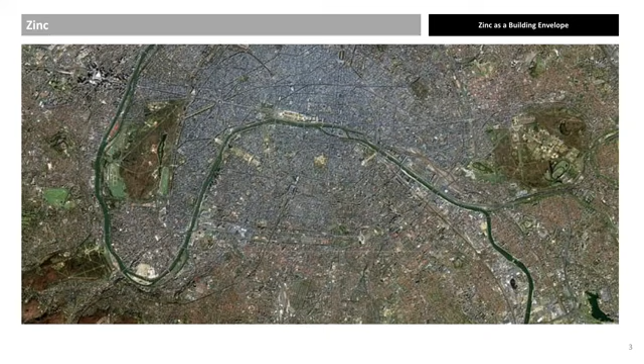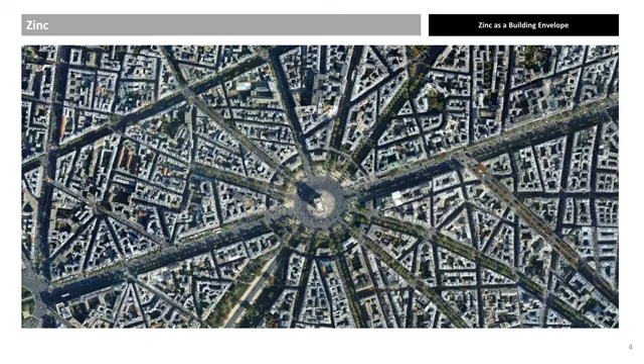This is a satellite image, but of what? An aerial image of Paris. The Arc de Triomphe is in the centre. Clearly you can see that the main colour from above is grey. That is because most of the roofs in Paris are covered with zinc. 95% of all metal used in Paris for roofing is zinc.

The nature of the architecture chosen by Baron Haussmann in the middle of the 19th century, combined with the colour and availability of zinc, made it the ideal material. Much of this architecture required roofs to have a slope of 3 degrees. This is still the minimum slope for zinc roofs as built. Going below this slope greatly increases the chances of water ingress and staining and is not recommended.

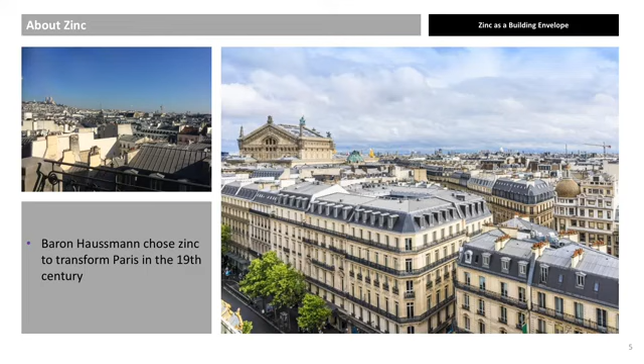Paris and St. Bartholomew's Church in Liège. First ever zinc roof fitted in 1809. Zinc ore is relatively common. The richest areas are Peru and Canada, but zinc mines do also exist closer to home in Ireland and Sweden and up until 1949 in the North Pennines. Traces of zinc were even found in the ruins of Pompeii.

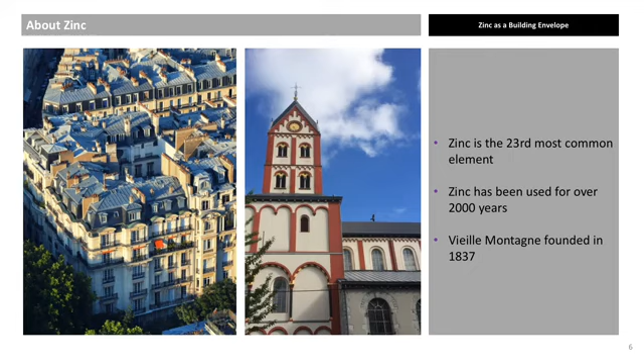VMZINC has been produced continuously since 1837. Prior to the 1970s, all zinc sheet produced was mill-finished natural zinc. Furthermore, older zinc had more impurities, such as cadmium. This can sometimes give the zinc a whiter aspect, visible in this photo. Cadmium has been eliminated from zinc for almost 50 years now.

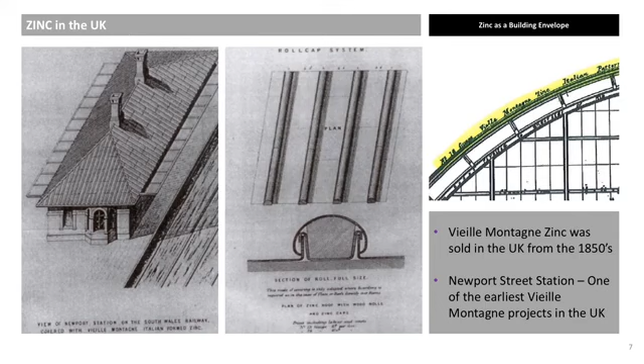Zinc was not only used in the redevelopment of Paris, but was also widely used in the UK for civic buildings, railway stations, King's Cross facade, etc. in the 19th century. However, zinc's use in the UK, unlike in continental Europe, remained quite limited and indeed almost disappeared entirely by 1990. Zinc production and sustainability.

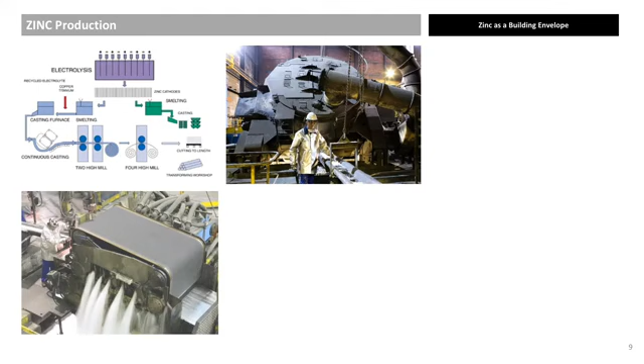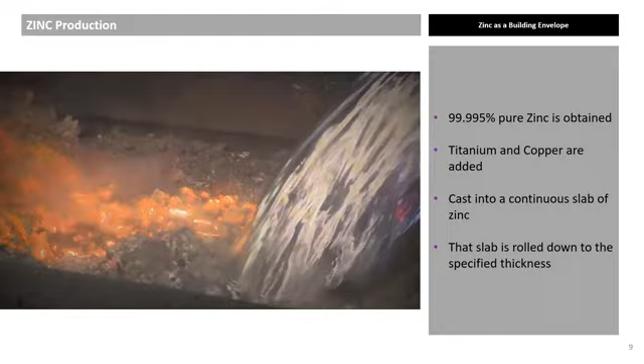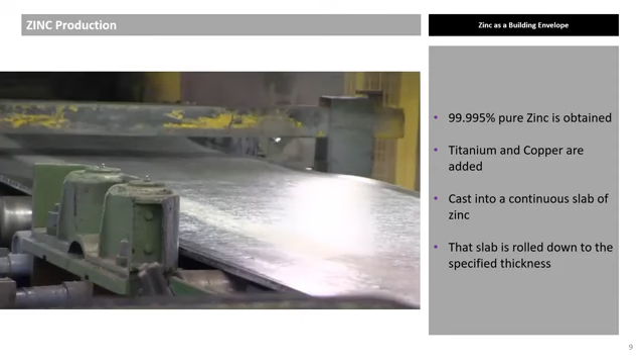Approximately 1 kilogram of titanium and copper are added to 999 kilograms of special high-grade zinc, EN 988, in order to improve the tensile strength and creep resistance of the material. The mixture is heated up in an oven before being cast into a continuous slab. The zinc is then rolled down to the necessary thickness. Zinc used in the UK is usually between 0.7 mm and 1.5 mm.

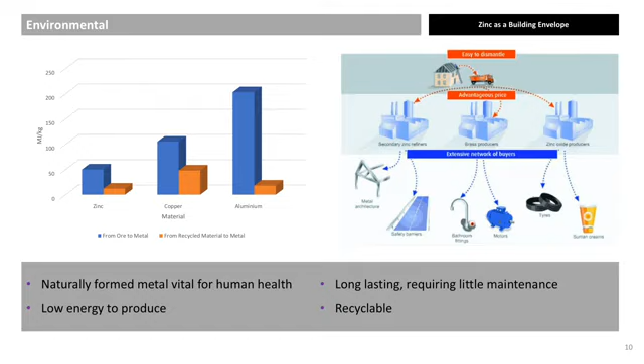Zinc is a non-toxic element, Zn, and required by all living organisms, an essential element. Due to electrolysis taking place at room temperature, less energy is required to produce zinc than other metals. The BRE Environmental EN 15804 gives an expected life of 100 years for a zinc roof. At the end of its life, with limited maintenance, zinc is 100% recyclable. Some recycled zinc is then used for roofing applications, but much is also used for galvanizing, brass production and zinc oxide used in skin creams.

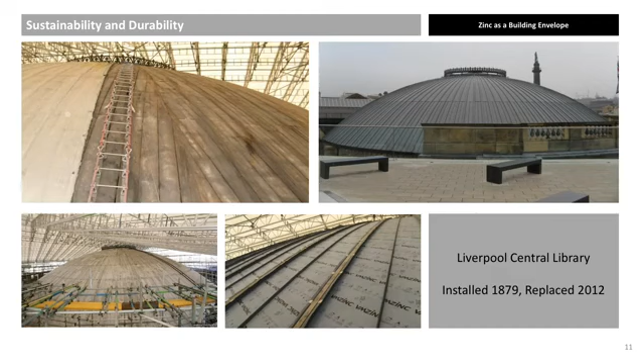The Picton Reading Room Dome, Liverpool, was built in 1879 using zinc. After 133 years, many of the zinc panels were needing to be replaced. However, much of the original open-gap boarding was kept due to good design and installation. While the vast majority of the original design was kept, 21st century regulations meant that panel width had to be reduced and standing seams were incorporated between the batten caps. Current corrosion rates are less than 2 microns per year. A sheet of zinc is at least 700 microns thick.

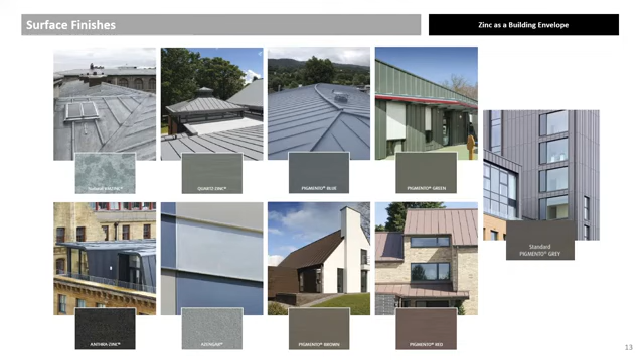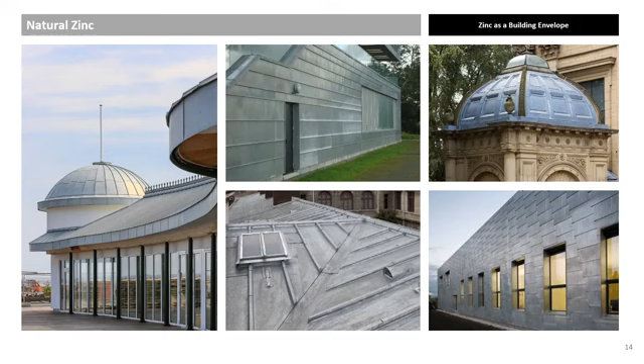Aesthetics of zinc. Zinc can be chemically treated to give a wide range of different aspects, but always with a hint of grey. Natural zinc was the only option until 1978. Natural zinc is shiny but forms a patina when it reacts initially with water and then carbon dioxide. After 3 to 10 years, an even middle grey patina is formed, but it takes time for this to become uniform, and many building owners are not that patient.

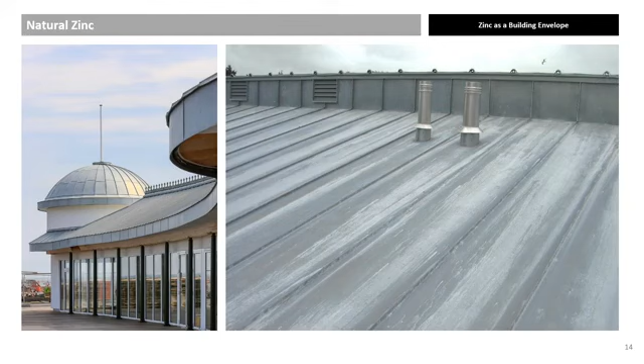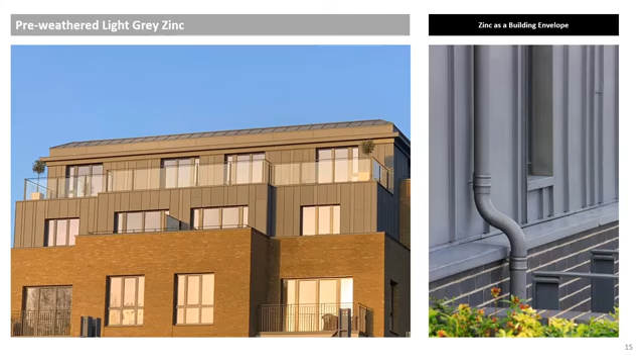Pre-weathered light grey zinc imitates naturally weathered zinc through a phosphatation process and changes very little over the lifetime of the roof or wall. Whilst pre-weathered light grey zinc is not a painted finish, it is closest to RAL 7037. Examples of light grey pre-weathered zinc: Borough Viaduct, Winchester House, and Sevenoaks School.

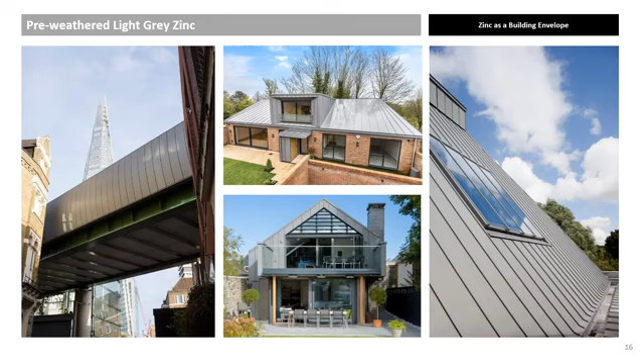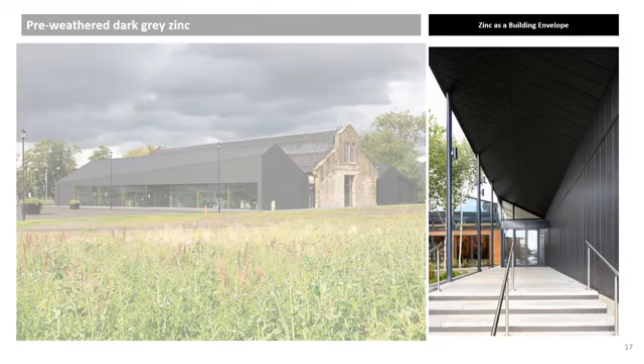Pre-weathered dark grey zinc was first created in 1978 as a complementary flashing and gutter material for slate roofs. Its dark grey aspect has made it very popular for both wall cladding and roofing. Zinc would never naturally patina to a finish as dark as this zinc. Whilst pre-weathered dark grey zinc is not a painted finish, it is closest to RAL 7021. Engine Shed, Stirling. Murphy's Construction HQ, London.

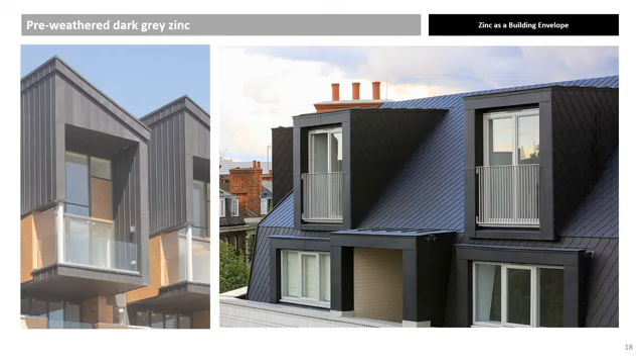Pre-weathered zinc can be used in the same way as a natural mill finish zinc, whether it be for roofs, walls, using various techniques, or even gutters. Seen here at Cardiff Point and Bourne Estate, London.

Blue, red, green, brown and now grey are pigmented finishes. The mineral pigmented zinc range is not a painted finish. Rather, it is more like looking at light grey pre-weathered zinc through tinted sunglasses. The surface colour is created by adding mineral pigments to a durable pre-weathering, which is then sealed with a protective coating, creating beautifully organic red, green, blue, brown and grey pre-weathered zincs.

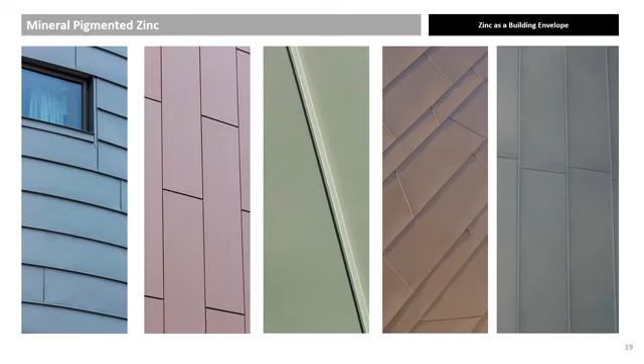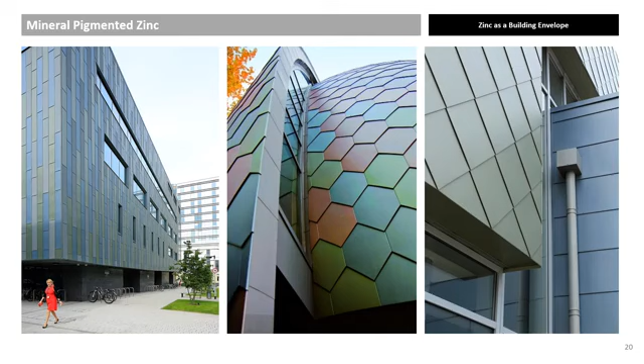It can be used for the same applications as natural, light and dark grey pre-weathered zinc. Examples shown: Glasgow Hospital, an architect's office in the USA, and Southampton Hospital. Godson Street in London uses all finishes.

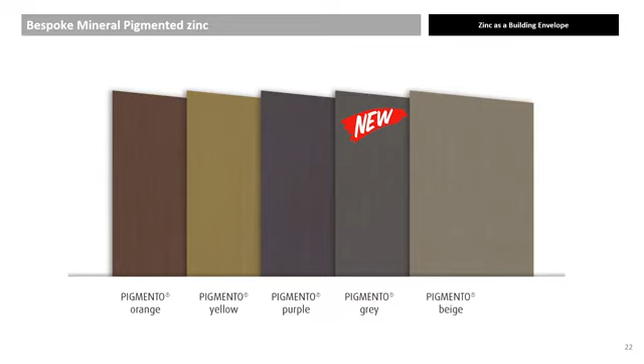Job-specific mineral pigmented finishes are an option when the minimum order is 3 tons. These colours illustrate some of the possibilities, but bespoke colours are possible. Light grey pre-weathered zinc is the base, so darker colours are best. Bespoke pigmented green. Body Shop brand relaunch. Oxford Street, Bond Street store, global rollout.

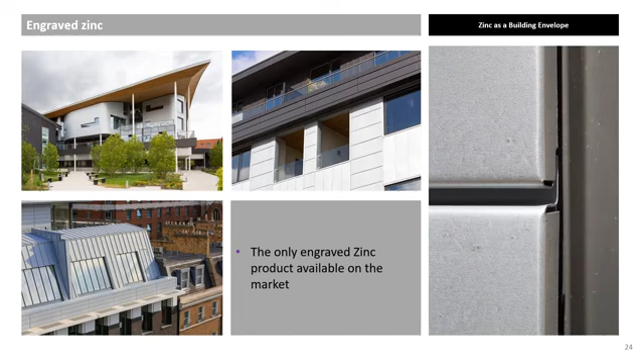Engraved zinc combines a mechanical treatment with a chemical treatment and can be used in the same way as all other zinc finishes. Examples include Maxwell Centre, Cambridge, BDP Architects, Shrewsbury Renovation, and Seymour Street by Eric Parry Architects.